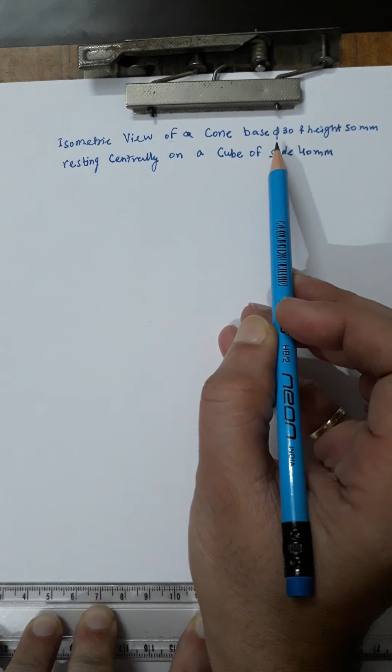Students, in this video I will discuss how to draw the isometric view of a cone, base diameter 30, height 50, resting centrally on a cube of side 40 mm. So it will be one solid resting upon the other solid centrally.

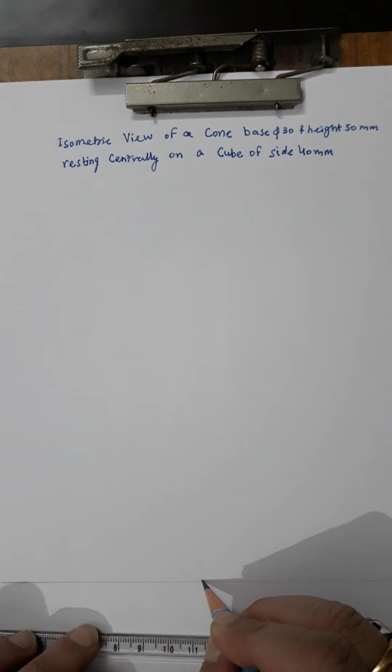So I will be drawing the xy line first, then I will take any suitable point, then I will be drawing two 30-degree lines both sides of this. On the other side as well I will be drawing a 30-degree line.

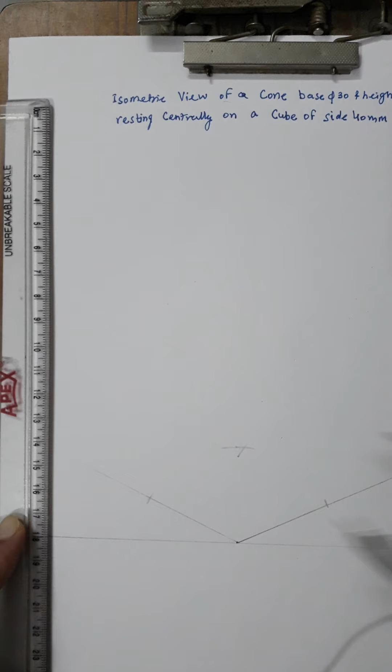Now you can measure this 40 mm because the edge of the cube is 40 mm. I measured it 40 mm, then I will be marking 40 mm both sides, and then you can also mark it this side. I'll be joining this. So join this with continuous thin lines; always join with continuous thin lines.

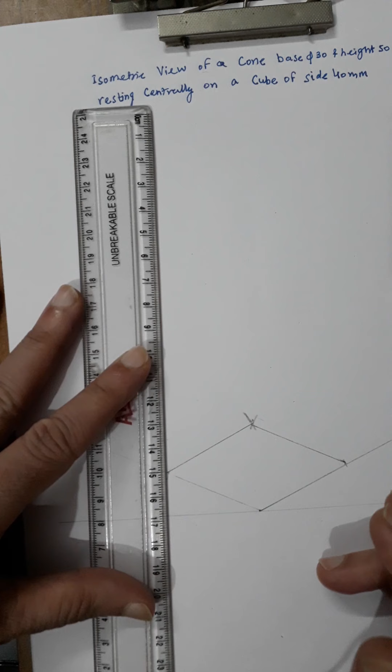Now this is the base. Now I'll be measuring the height as 40 mm. It is given, it is 40. So you can draw the vertical edges 40 mm. So we'll be making the cube now. Forty mm. Just draw 40 mm from all the edges.

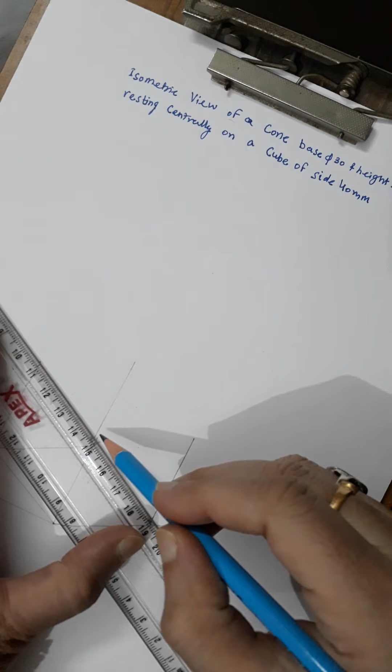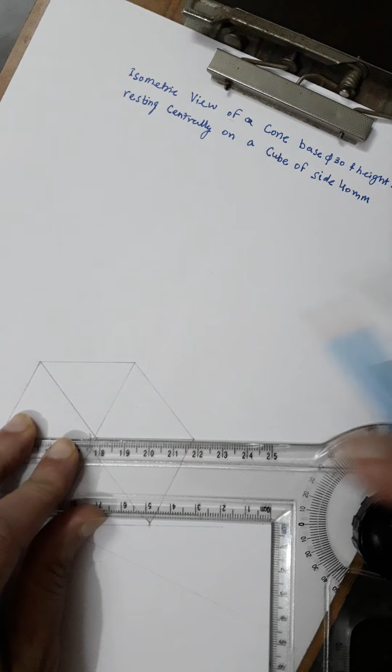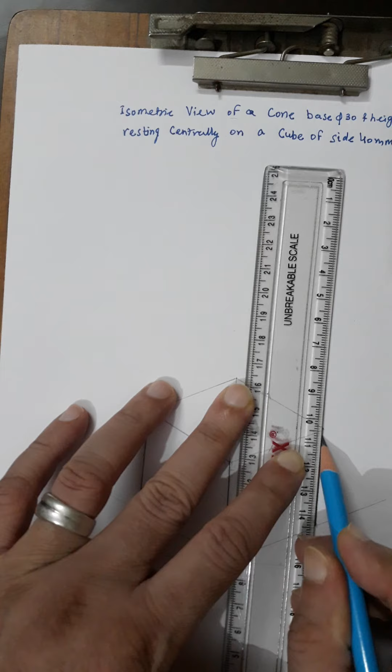Now you can join the tops. Join the tops of the edges. Always draw thin lines because you might have to erase some of the lines at the end. Now I will be erasing any unwanted lines. Now you can make it thick lines, whatever is visible. So whatever is visible, you have to make those lines thick.

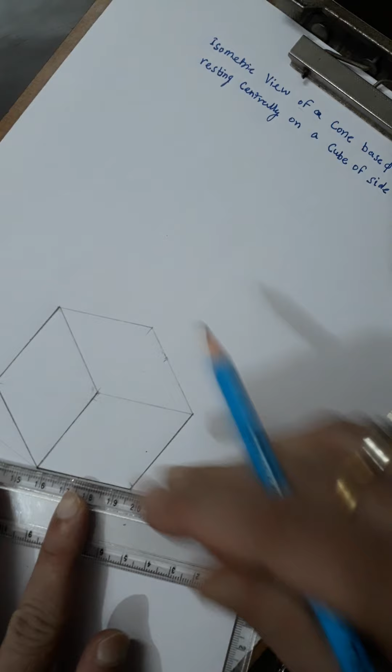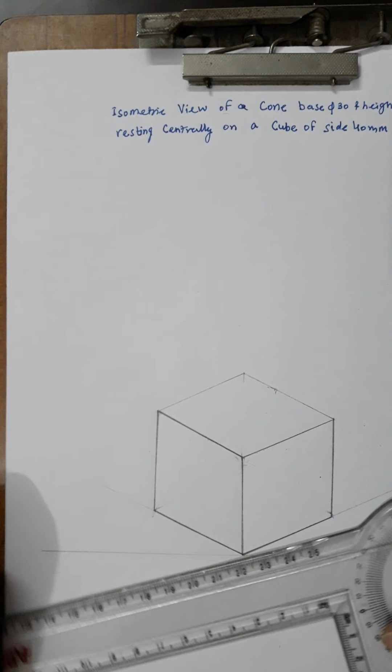Then you have to make the cone above this. Yes, you can make these edges thick as well. The back edges can still wait. I will do it later on because we have to draw the cone now. Before that we have to find the center of this cube. I'll be finding the center. So this is the center of the cube.

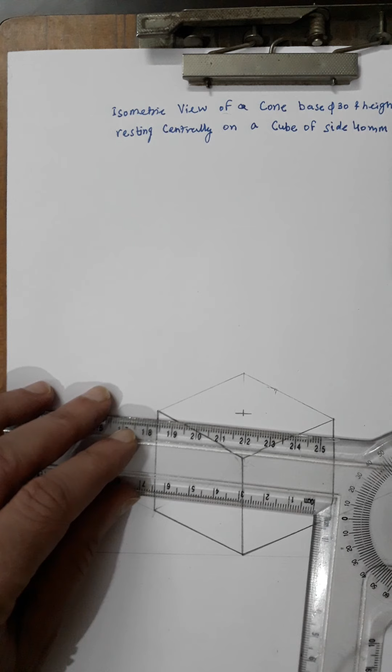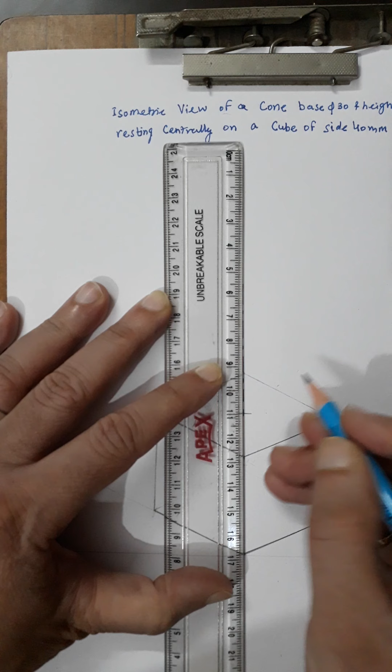Now the cone is centrally placed over here, so the center of the cone and the cube is the same. Now I'll be drawing the cone. First you need to draw the center line throughout from this center of the cube. Then you can measure the diameter of the cone, which is 30. So you can measure 15 above and 15 below. Then you can draw any horizontal line passing through this center.

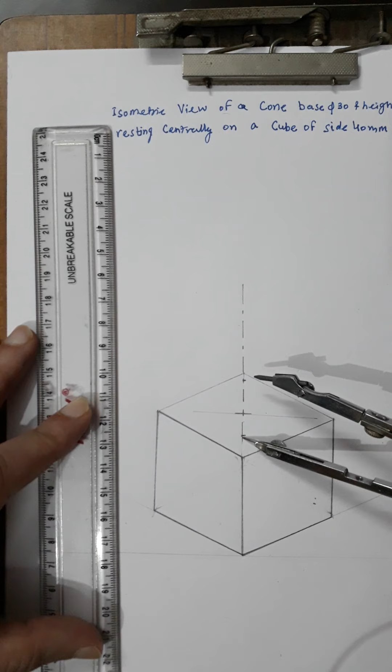Now you can measure 30. So this is 30 mm. Now I will be marking 15 from both sides of this line. Now you can join these points. I will mark 15 here; I had not marked 15 on the lower side. 15 above and 15 below. Now you will be drawing these lines. This is the rhombus for the ellipse you have to draw.

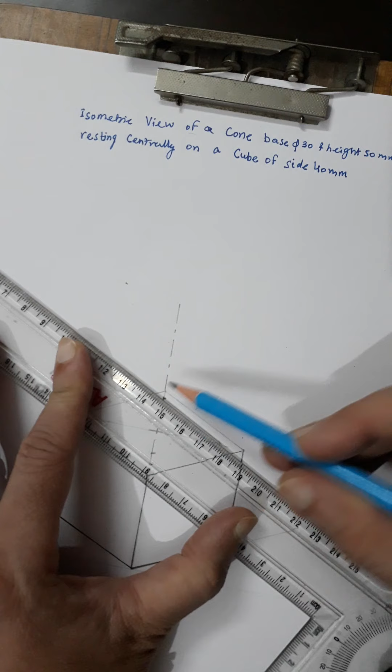Then you will be making the ellipse inside. Join this for the rhombus. Always use thin lines. So now this is the inside rhombus. Now I'll be drawing the ellipse.

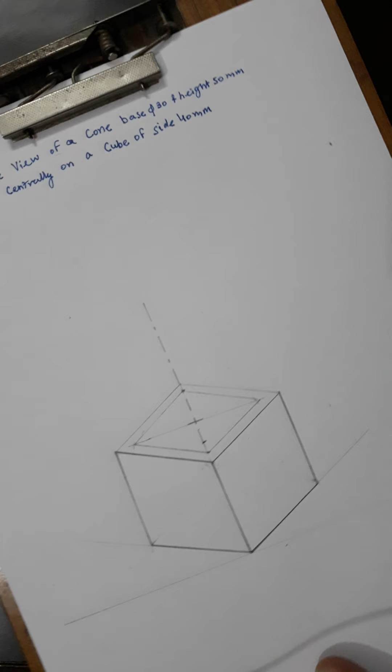You need to find the midpoint, 15 mm, because the diameter is 30. 15 will be the midpoint of all these edges. So you need to take care to mark the midpoints; that is very crucial. Now you can join the corners of this rhombus with these midpoints as usual. Then I will be making the ellipse. Always use thin lines.

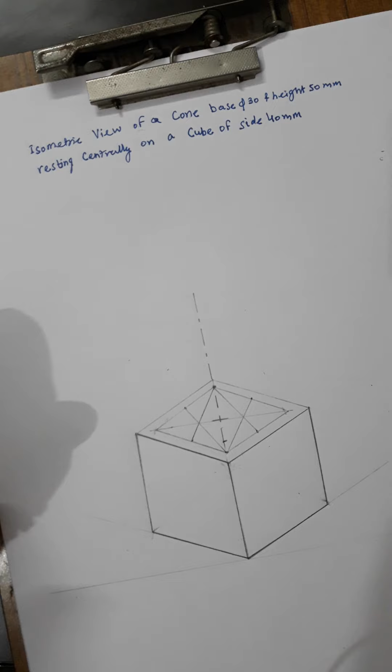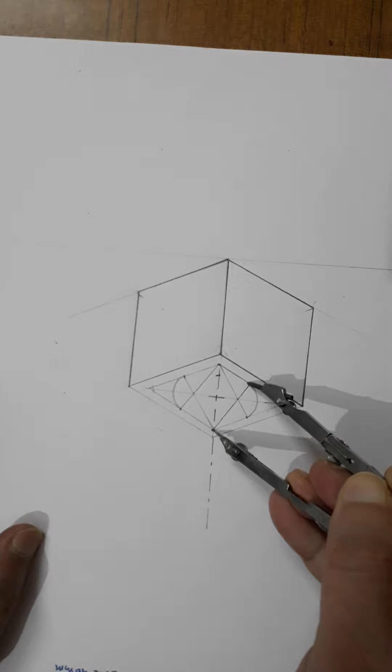Now I will be making the ellipse by using the 4 center method. With this as center, you can draw this arc, and from the other side as well you can draw this arc. The inside arc I will not be making. You can join this.

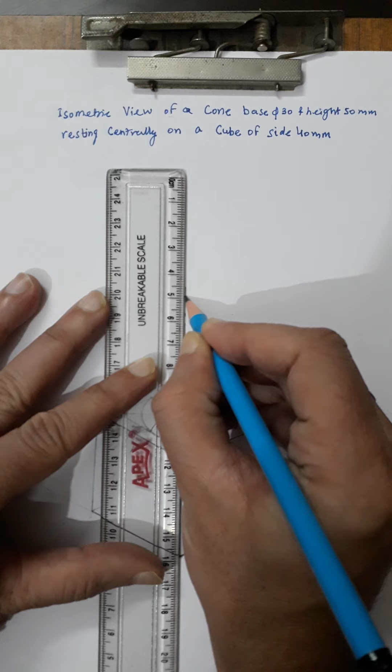Now you can measure the height as 50 mm from this center along this axis. So I measure this 50 mm, and then you can join this with tangents, simply the tangents, both sides. Now it is complete. I will be doing the dimensioning only.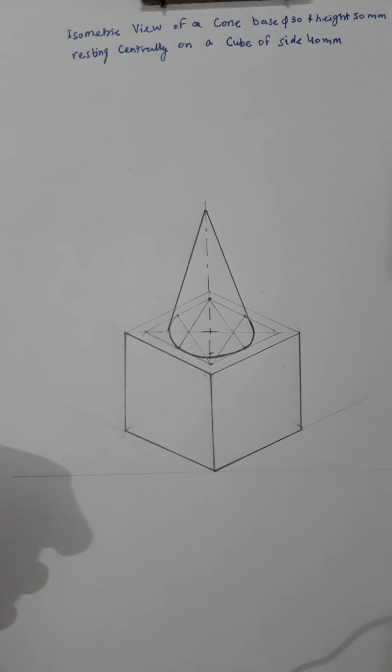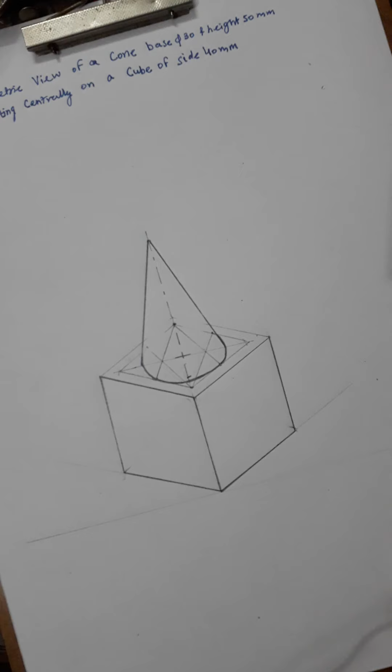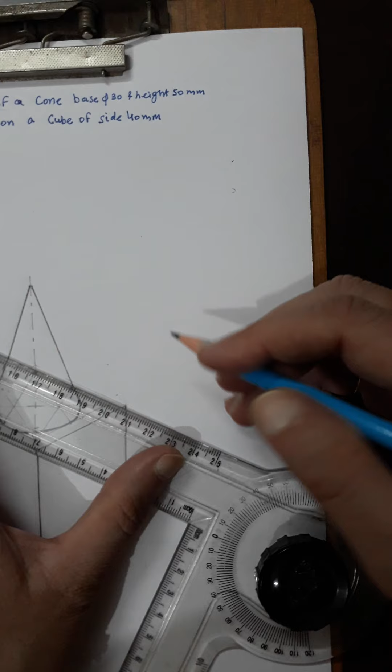You can erase the inside lines of this cube because they are not visible. Then you can make these lines of the cube thick, up to wherever they touch the cone. Now it is complete. I will be doing the dimensioning now. Now I have done the dimensioning as well. You can also mention X and Y on both sides of this reference line. So I think this is complete now.